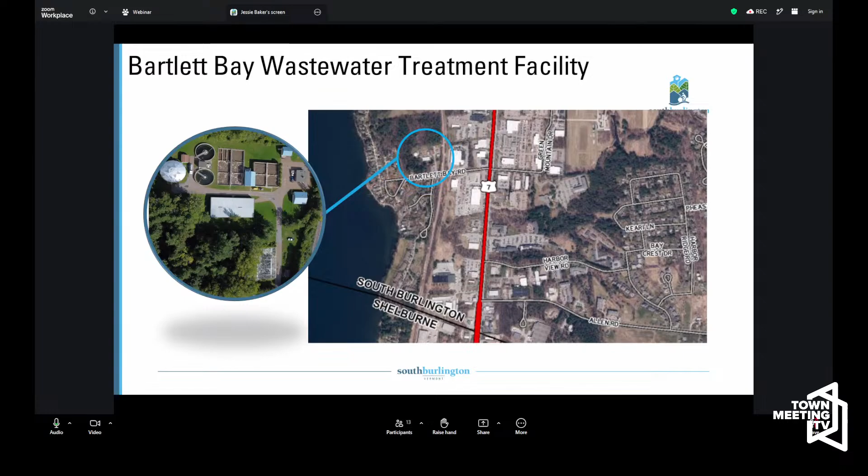So we are specifically talking about our Bartlett Bay Wastewater Treatment Plant facility. This is our second of 2 wastewater treatment facilities in the city. We have also our Airport Parkway wastewater treatment facility. This facility is down off Shelburne Road on Bartlett Bay Road and serves about 7,000 of our residents and businesses in the city. It serves everything west of Spear Street. And it functions in partnership with Airport Parkway in that the solids are handled at Airport Parkway.

Bartlett Bay really, and both of our wastewater treatment facilities are really a substantial part of our core municipal services. This is something that the city has to provide to ensure the public's health, to ensure the cleanliness of our environment. It's critical to protecting Lake Champlain, and does so by removing phosphorus and pathogens from our waste stream, everything that comes through our waste stream in the city before the effluent or the output of our wastewater treatment plant hits Lake Champlain. So our wastewater treatment plants remove over 99% of those pathogens from the stream before it hits the lake. And this upgrade is really urgently needed.

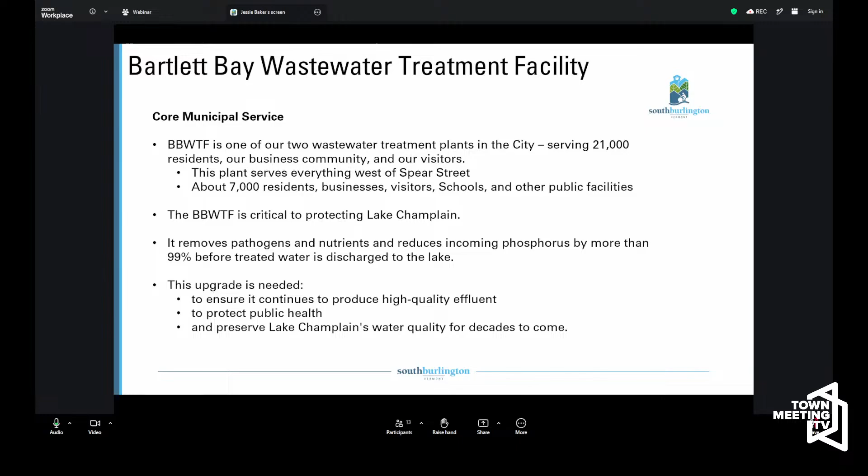This is to ensure that we continue to produce that high quality effluent, or what is being released from the plant, ensure we're protecting our public health through a healthy wastewater treatment system, and preserve water quality in Lake Champlain for decades to come.

There's been a lot of conversation about why this is needed now in our community. This is a project that's been underway for several years. The community originally took a bond vote on this project back in 2023. And why we're coming to the voters now is that we have a fully designed and permitted project ready to go that meets our operational needs and the city's needs.

We have an obligation as Vermonters and residents to protect the water quality of Lake Champlain. Our existing plant is really at risk. We are at risk for high wet weather events as well as aging infrastructure that is beyond its useful life.

And then we have two opportunities. One, we have a low interest state revolving loan fund, the Clean Water State Revolving Loan Fund, at 2% that is currently committed to the project for the full cost. That is a program that is a great advantage to municipalities. The way you get on it is a community project gets on a list, and as it comes up, it is funded. So if we lose our place in that line right now, we will have to wait for that opportunity to come back around, or finance it a different way.

As I mentioned, we have a fully designed and permitted project ready to go, and we have a qualified contractor who is holding the bid for this project as we go through this bond vote.

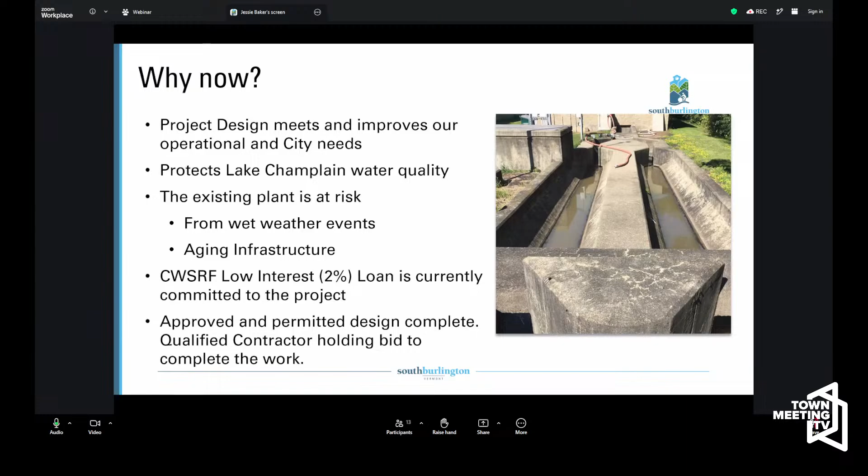Just back to a few data points on this plant's history and why we are at this place of end of useful life for a lot of the equipment and buildings and infrastructure that's there. This facility was originally constructed in 1970. Several of us in this room were not born when that facility was constructed. Throughout the decades to come, there were a few upgrades. We went to an A/O system in 1999. And in the early 2020s, the community really prioritized upgrading this plant as a priority.

So in January 2023, we completed, or started, the preliminary engineering report. We went through the notice to proceed in September 2023. The design was completed in May of 2025. Then we went through permitting. We advertised the bids in November, and they came back in January. As the community knows, they came back significantly over the initial cost estimate, as many projects in our country are coming back right now. And so we are going back to the voters now for this bond vote.

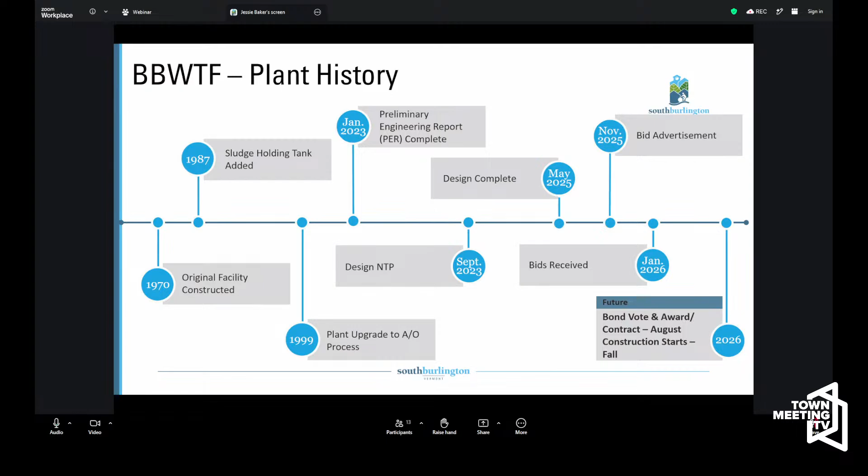And with that, I'm going to turn it over to Hoyle Tanner and our Public Works crews to walk us through the technical details of this facility.

Hello, my name is Kirsten DiPietro Warden. I'm with Hoyle Tanner and Associates. I'm the lead technical engineer for this project, and I'm just going to walk through the different portions of the upgrade design. On this slide, you can see all the components that we have proposed to be upgraded.

It includes a brand new headworks building, a new biological process called an A2O process, one new secondary clarifier with refurbishment of the two existing clarifiers, refurbishment of the existing filter building with expanded filtration capacity, a new UV and plant water building that will house new UV equipment, a plant water system, and the effluent heat recovery system, new sludge storage tanks, a new sludge handling building with a new chemical feed and storage area, and new operations buildings, along with site improvements and improvements to the yard piping.

This plant's permitted capacity is 1.25 million gallons per day. Existing flows are approximately 0.8 million gallons per day, so there's room for growth in the sewer shed for the Bartlett Bay facility.

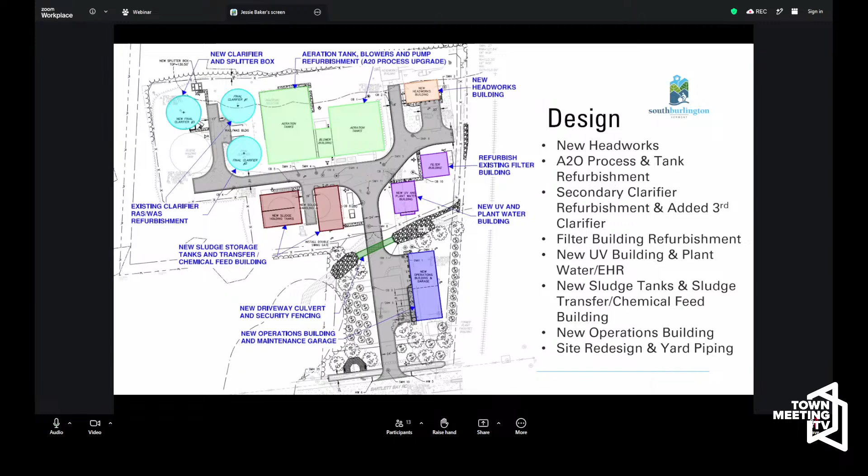Other drivers for this upgrade included replacing aging infrastructure. In this slide, you can see the existing sludge holding tank. Typically, current operations are that wasted sludge is stored here, and then it is trucked over to the Airport Parkway facility for treatment through the solids handling process.

That process over there is digestion and dewatering. The steel tank that holds the sludge has many defects, including holes in it, which do not allow the tank to be filled to its capacity. Therefore, that increases the amount of truck trips needed daily over to the Airport Parkway facility, which increases greenhouse gases and operator time.

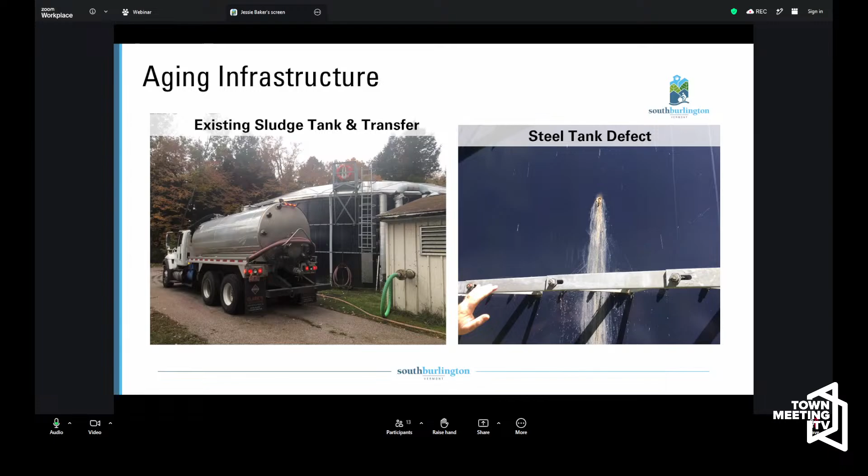The tank is corroding and is beyond its useful life, and the new design replaces this with new concrete storage tanks. Another issue, not shown on this slide, is the condition of the existing headworks. Headworks are a very corrosive part of the plant, and their typical life is about 20 years before you need to replace the equipment. Currently, the screening is insufficient, and the grit removal is insufficient.

So grit and screenings get through the headworks and end up in the wasted sludge. This is causing operational problems over at the Airport Parkway facility, affecting the treatment capacity at that plant. So there are operational issues that are being transferred over to your other facility.

A third point of aging infrastructure is the existing UV system. It is no longer supported by the manufacturer, the controls of that system. It works and it is disinfecting, but if it were to fail completely, it would need a whole system upgrade. We can go to the next slide.

Other challenges include, as we've mentioned before, wet weather events, large wet weather events. The peak capacity of this plant is stressed every time a storm comes through, and we have seen that in the past. A large storm in December of 2023 stressed the clarifiers to the point where it became obvious that a third clarifier was actually needed.

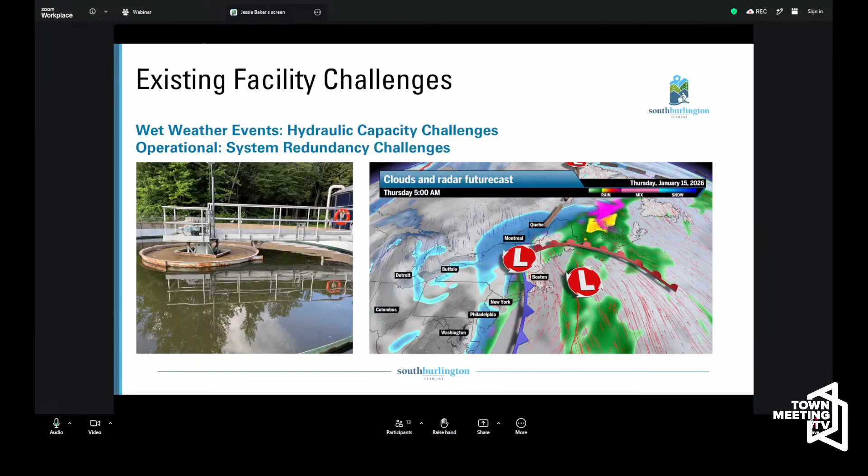They had one clarifier down for repairs, and they spent all night trying to manage the flows between their recycle rates and their pumping rates so that they would not lose solids over the clarifier weirs. It became obvious that a third clarifier would be needed to help with these peak flows that you're seeing in this sewer shed. Go to the next slide.

Oh, maybe there is. Oh, I didn't know that. You can talk through those if I have time. Do I have time? Yeah.

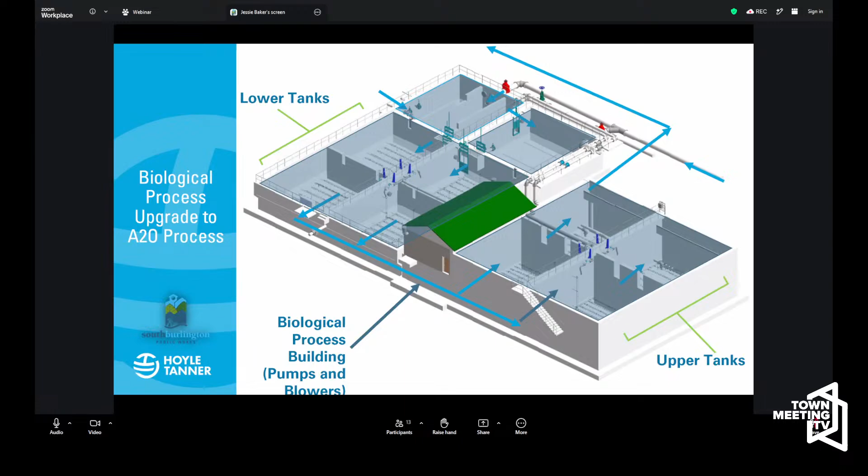One of the aspects of this upgrade is the inclusion of a digital performance platform. It's a digital twin, a computer model set up of the process. It takes real-time data from online instruments situated throughout the tanks, and pushes that information to this digital twin that sits on a cloud.

That digital twin then performs AI algorithms to make predictive decisions about the plant and to help the operator with adjusting flows between the tanks, recycle rates, chemical feed, and all those examples.

This is like an operator's best friend. Instead of them having to manually adjust all of the different set points and the different ramping up of the blowers to raise the DO in the aeration tanks, or to lower the DO in the aeration tanks.

This platform is called HubGrade, and it is proprietary to Veolia Water Systems, and it is part of the pre-procurement package that we established at the beginning of this design project with the A2O process.

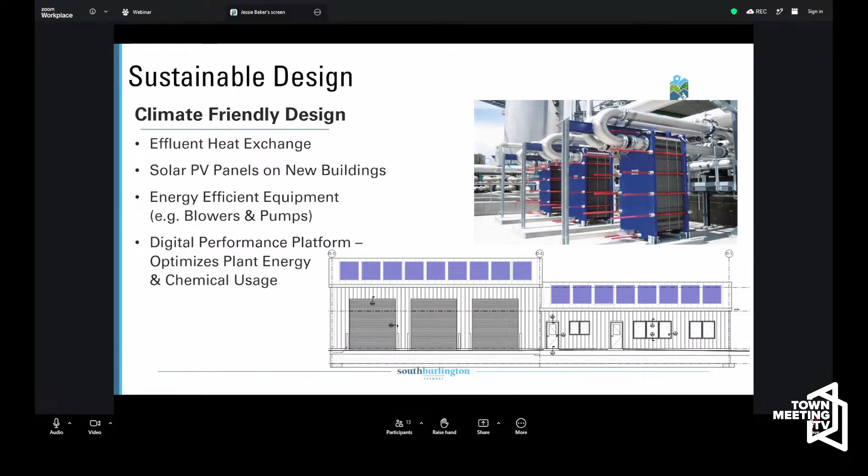The natural gas consumption is going to go close to zero. The 500 CCFs is just to be a backup heating supply in case it is needed for the boiler system. This is a savings of close to $22,000.

The solar arrays will produce about 105,000 kilowatt-hours, which will be an annual savings of another 21,000. And the digital performance platform is anticipated to cut the chemical consumption considerably, saving the city about

$135,000 annually. I just should note that the chemical costs are one of the largest costs in your O&M budget, along with the electricity needed for the aeration tank blowers. Those are some of the biggest costs. So all of these design elements we looked at to try to save the city operation and maintenance costs moving forward.

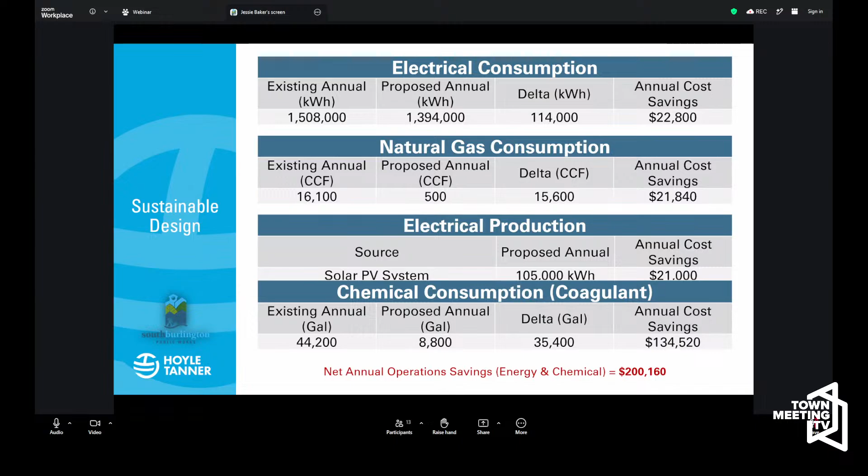So just in summary, there's been a lot of conversation about what has changed from the 2023 estimate. There are two different sets of significant changes. External factors we are experiencing nationally: inflation, rapid construction escalation, the Buy America Build America Act came into play for this project, and as tariffs increase, that significantly increased the cost of materials and fuel costs. And then there were design changes that went along with meeting the core needs of this operational infrastructure for the facility, including the third clarifier, the change in the foundational design, the removal of the buried tank, the climate resiliency factors, and the permit restrictions that were in place around wetlands.

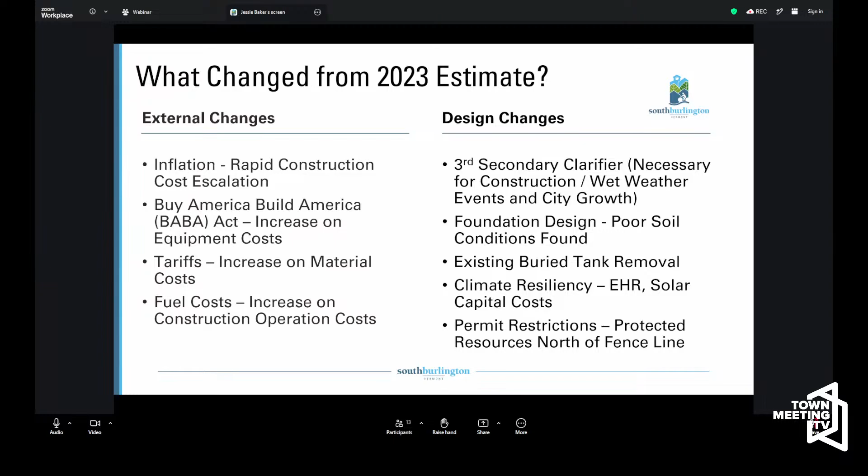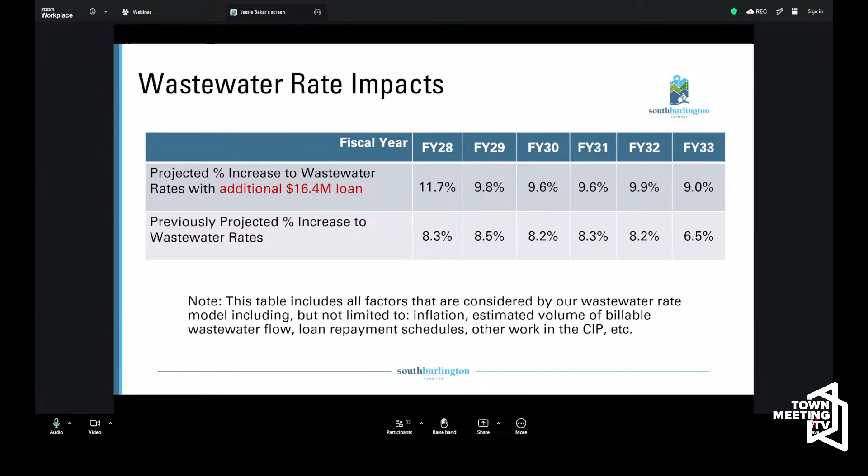We've gotten a few questions about what this percent change actually means to an average ratepayer, which is a good question we didn't answer before. In FY28, going from an 8.3% increase to an 11.7% increase equates to an additional $16 over the course of the year for an average wastewater user. There are drastically different types of wastewater users depending on family size, family composition, business type, etc., but for our average user that is the impact, which includes all models of other personnel and O&M costs associated with running our wastewater system.

Obviously our residents are most concerned about the impact to them as this changes over time, but we want to note our team has worked really hard to keep water rates low. Right now in FY26, we have the lowest water rate among our comparable communities across the region. And if you look at what that rate will be in FY32 compared to what other people's rates are today, we are still in the middle of the pack six years later.

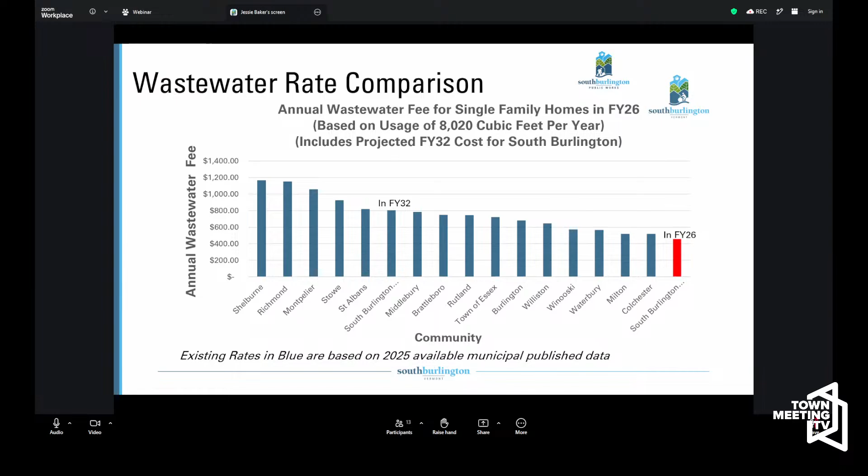So the next steps: tonight is this informational public hearing as required by statute, and tomorrow is the vote. Just a reminder that the polls are open 7 a.m. to 7 p.m. If you have your ballot that was sent to you and haven't submitted it yet, you can drop it in the drop box here at City Hall or return it to your polling place tomorrow, or come into your polling place and get another ballot.

Let me just point out that if you have your ballots and haven't returned them, and it's getting closer to 7 o'clock tomorrow, take them right to your polling location—don't put them in the box. They do check the box very late and they'll run them over to us, but please, if it's like 6 o'clock, just take it to the polling station.

Thanks. Just one more thing to highlight: this bond is not just for Bartlett Bay, but also for the improvement of the Queen City Park pump stations and the completion of the work at Airport Parkway. So it is going to bring essentially our whole wastewater system into solid condition for the next 25-plus years.

One fun fact I learned when I went through the plant: the water discharge we send, particularly to the Winooski River, is cleaner than the water already coming down the river. So our plant is actually helping clean the river above and beyond what we're doing to treat our own wastewater. To me, that's just kind of amazing and quite cool.

I have just a technical question, can I ask? In the new design, how many extra sensors are there going to be in those tanks? I don't have the exact number, but it's quite a few.